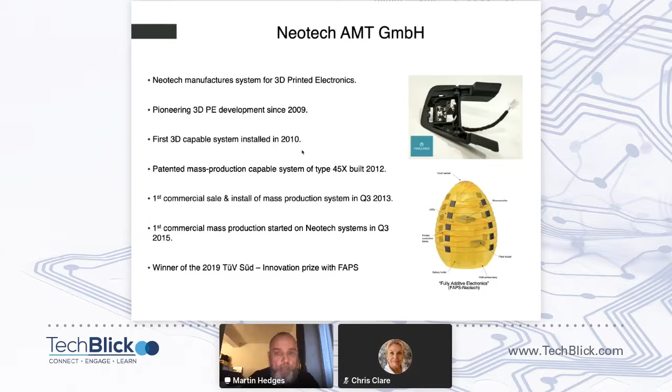But before I go into the technology in more detail, maybe some of you are wondering, what is the reason for doing this? Why do we need 3D printed electronics? And there are three main aspects, headings really. One is the design flexibility. You move away from 2D, you go into a 3D world, then you can obviously get flexibility of shape, more integrated products, you get miniaturization, new functionality.

Then you also have to consider economics. Now, economic benefits can come from different sources, the reduced number of processes that you have in making your electronics or mechatronic systems. You can have increased reliability, so that's economic aspects. And then also, like a lot of printed electronics applications, there's the environmental benefits compared to a classical PCB based electronic system. Good. So that's why you would want to look at it.

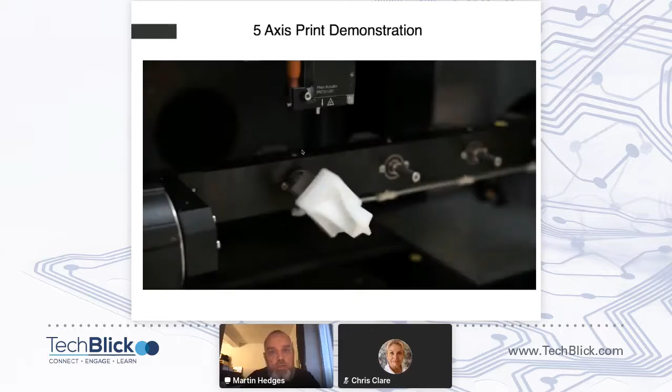So what I thought I'd do here is to show a video of a couple of print processes working. So we work with a variety of printing techniques, really depending upon the application that you have. So what you're seeing here is my favorite process. It's a jetting process. It's a very simple process. So we have in the orange syringe there a paste. In this case, it's very much like a screen printing paste, and that's jetted onto the surface.

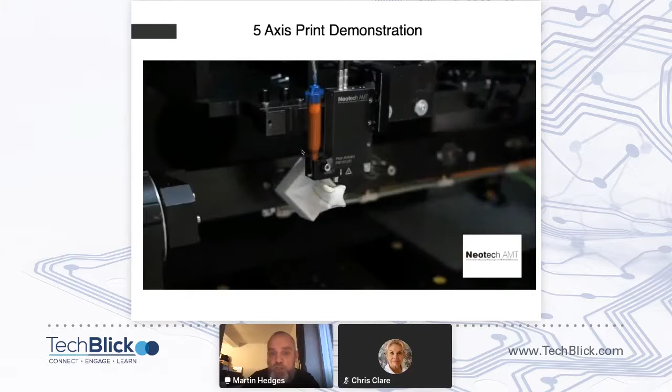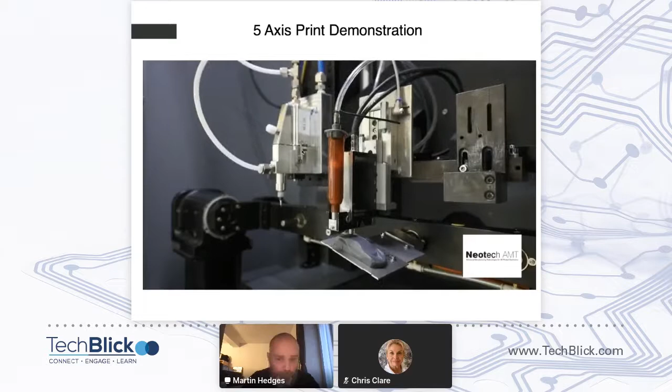And you can see the print head being manipulated over the surface, working with those 5-axis range of motion to print in 3D space. What you will also notice as well is that we have a gap. You can see that we can actually throw the ink using these types of processes. That really enables us to work at relatively good speeds on a 3D surface, even if we don't know truly what the 3D surface is.

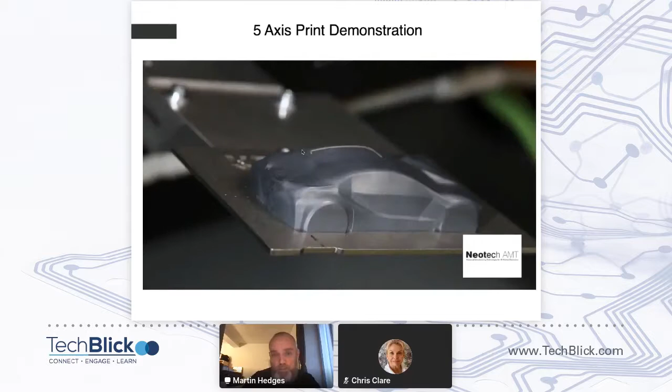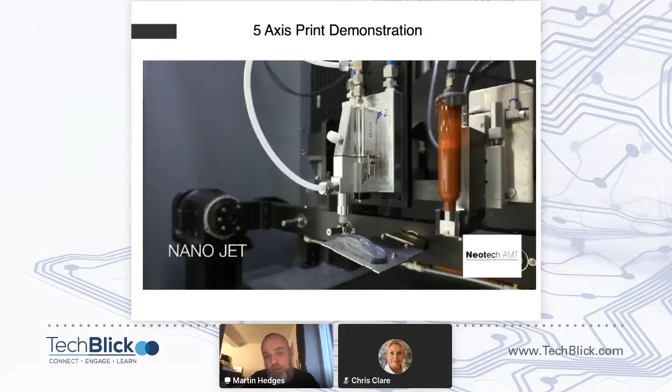So there you see this screen printing paste. It's been printed fairly thick. Those lines there are about 300 microns. Now, if you want to go finer, then you maybe have to use a different process. So this is a process called nanojet from the American company IDS. So this is an aerosol technique. So what you're doing here, you're printing much finer lines.

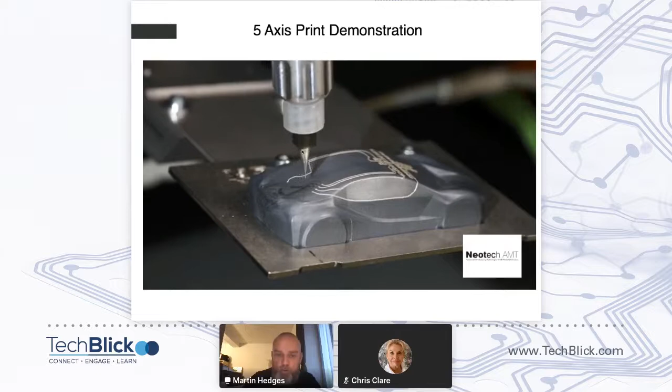So in this case, we're using a nanoparticle ink that is aerodynamically focused. Again, you can quite clearly see the standoff distance, but what that allows you to do is to actually get some different kind of result. So with the piezo jet, we've got a viscous paste, a screen printing type material that goes down very thick. It has relatively wide feature sizes. With the nanojet type process, you go to finer lines that use more fluid inks. You have thinner layers.

So there are really many different types of techniques you can use in designing your print process. Good. So, how scalable is this? I mentioned in my slide on the overview of Neotech that we've had some volume manufacturing success.

So what we did initially, way back in 2012, we were printing on components that are produced by traditional manufacturing techniques. So that could be injection moldings, or it could be a composite, or it could be a forged component, or whatever. But basically what you're doing is you're printing onto an external surface.

And as time has gone on, I think about 2016, we started to actually look at a different process route, which really then is more focused currently at prototyping, maybe potentially near term through to medium volume manufacturing. And that's by combining these printing processes with classical 3D printing. So I think most people are familiar with plastics 3D printing, so use FFF, fused filament fabrication, build a mechanical structure. And then within that process, you can add your surface mount devices.

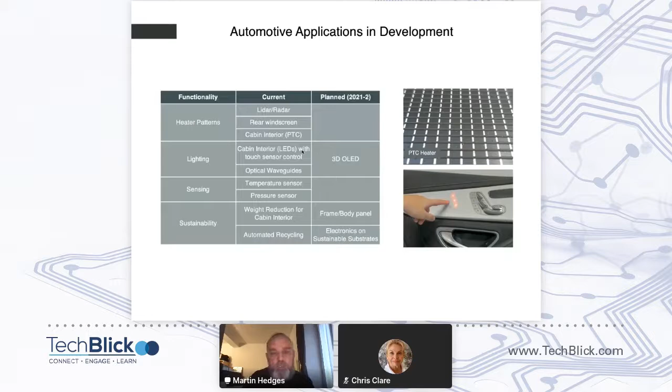And sustainability, that's going to become more and more important over time. Weight reduction, the fact that you can reduce the number of parts, reduce the wiring bundles. We've also got a lot of work ongoing on automated recycling, looking at the sustainability aspects of making these electronic structures. We've done previously a lot of work, and still a lot of work is ongoing in cell phones.

So what you actually see there on the top right-hand corner is an example of one of the 45X systems working in a mass production scenario. So we're printing conductive materials typically onto an injection molded material, polycarbonate, PA, those kinds of materials.

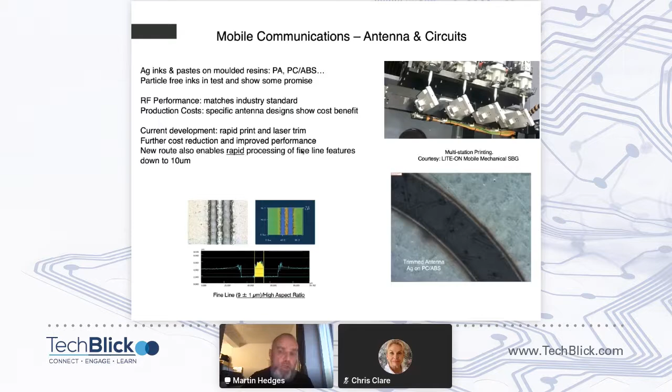What we're also doing now, we're going beyond that and applying printing very fast and then using a subtractive step. So we're using laser ablation now to actually cut and trim those structures. There are certain benefits that you can get with that, so you can make finer features, more accurate features at a much higher speed and a much lower cost than just by printing alone in that case.

Good. Another application here that was recently actually sent up into the stratosphere. So this is an injection molded box, polycarbonate, and that has 3 antennas on it. So that just shows you the ability, with some of the techniques, to access the internal structures on a molding in this case to create some quite novel devices. Healthcare is another area.

There's an example here from one of our customers, EverYoung BioDimension in Taiwan, who printed this rehabilitation ball, so printing on a sphere, printing the circuitry to connect up these surface mount devices, to use that as something for patients to continue their rehabilitation by squeezing, mechanically working the ball. And you can track all of the data and see the progress that the patient's making there.

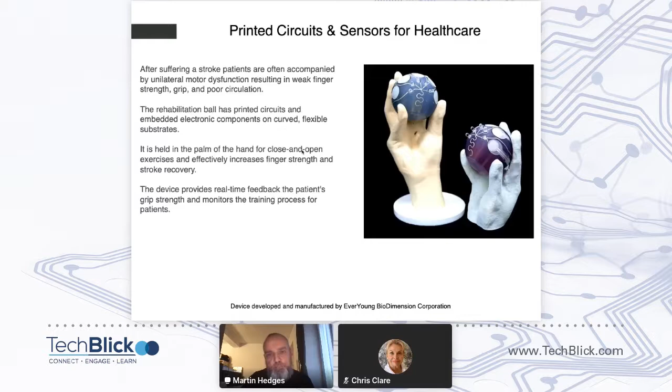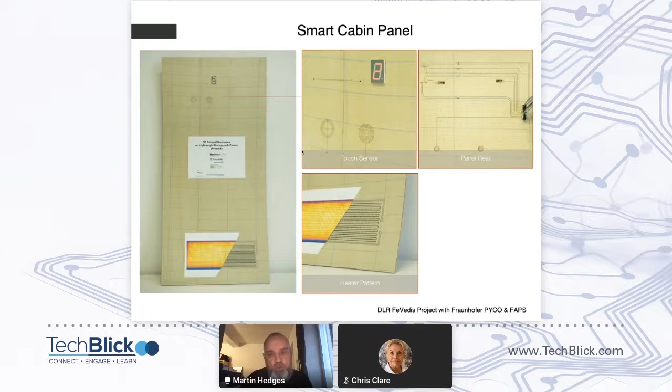Aerospace is another area. We get involved really mainly in commercial aerospace applications. We don't get involved in military applications. There's an example here. This is, some of you might remember, flying on aeroplanes. This is a cabin panel lining, so it's a composite structure, honeycomb composite structure, and this is a thing that you sit next to where you have the blind on the wall there. And then putting electronics onto that lightweight structure and through that structure. Touch sensors, heater patterns are the current demonstrators for that field.

Good. So those are some of the examples that I've talked about on the printing with using traditionally manufactured components. So I want to just show a couple of examples now on fully additive 3D printed electronics. So this again is a combination of 3D printing plus electronics.

So this is an application that was developed by the University Erlangen-Nuremberg FAPS department, and they've basically 3D printed an egg timer. So they have a touch sensor on the top. They control those LEDs, and the LEDs are controlled by a timing circuit that is in the controller that you can see. If you look at the images on the bottom right-hand side, you can see the controller there embedded really in the center of the egg. There's a buzzer there for an acoustic signal, so when the egg timer is finished, it will buzz, and obviously the lights will flash.

And that's quite interesting, that you've got this embedded structure with the electronics. We've got something like 2 meters of circuits in there, and you've got electronics inside and outside. So the body is built by 3D printing, so fused filament fabrication. The electronics are added, the circuits are added during the build. Yeah, so that's something that is pretty novel and pretty new, that can be done with this kind of technology.

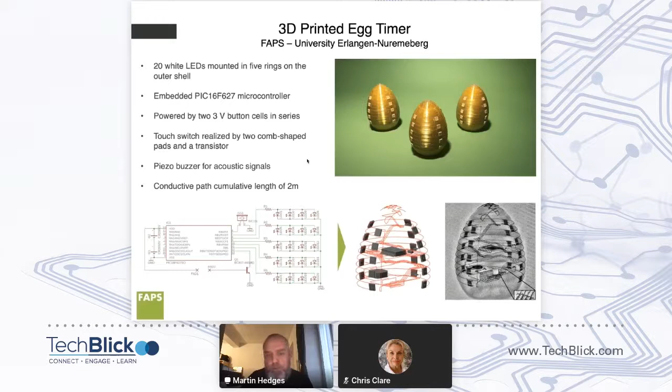We also have a similar kind of program, similar set of work, doing the same kind of thing with ceramics. So we had a project AMPEX, additive manufacture, printed electronics with ceramic substrates. So in this particular case, we're dispensing ceramic paste, in this case an analog to LTCC materials, low temperature co-fired ceramics, which is alumina-based ceramic materials that are used in high temperature circuit boards. But we're printing that, and we've shown the ability to actually embed functioning electronics within that 3D structure.

And that work will now be carried on with the Additive for Industry, a German federally funded project, looking at applications, high frequency antenna and sensor circuits. So again, using, in this case, a dispensing technique to dispense a mechanical structure, and then putting electronics inside and outside. Good. So how does this look when you look at the actual products, what we manufacture?

So you have the ability then to select a print platform, so you can have multi-head print systems where multiple heads are working in parallel, for volume manufacturing. You can have a single head, and I say single head, that's like at any given time only one head is active, but multiple heads can be in there, different tools. And that's really focused at R&D and product development. We build those systems in various sizes.

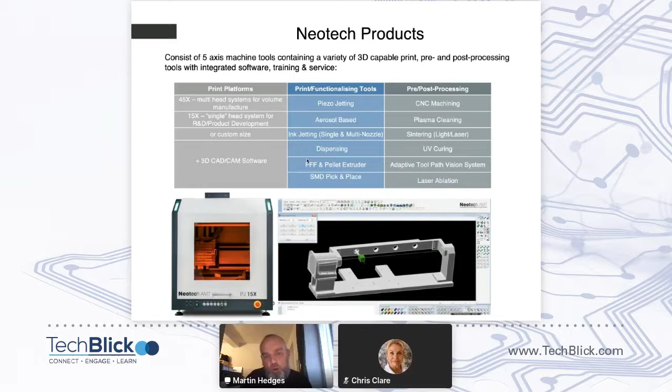Good. So we talked a little bit about scalability. One of the things that we have to consider, if you think about the example of the egg that we built, is that you're actually embedding structures potentially. And obviously the build times can also be quite long if you're building a mechanical structure through classical 3D printing. So you need to be able to control the quality if you have electronics inside the mechanical body. That's even more important than if you're printing on an external surface.

So there's currently a project ongoing looking at automated quality assurance. This project is called QA-KAM. It's funded by the German Ministry for Business and Energy. And the idea is that we have a vision-based system that will automatically record the printed structures in your 3D printed device. As it's built layer by layer, it will record that data. It will compile those images. It will compensate for any distortions from the camera. So we should be able to get width and height and get different views on the printed structures.

And then it will use artificial intelligence to check for potential defects. Have we got a break in the line? Have we got a short circuit? Are there some other defects? And then depending upon the defect type, it will do one of three things. It will either automatically correct, which might be quite simple. If there is a break in the line, it knows the position, it can go back and print that again. But other things might require some operator input, or the system just decides it will abort that print and carry on to the next one.

So that for me is a very, very exciting development. To put some intelligence into this process chain to help us scale, to get reliable parts into the electronics. As I say, that's especially important if you're mixing multiple materials, you're embedding structures.